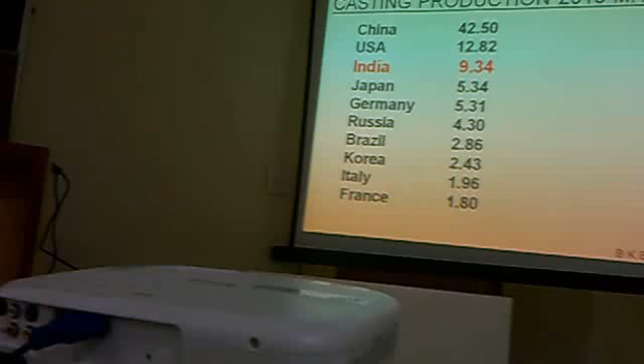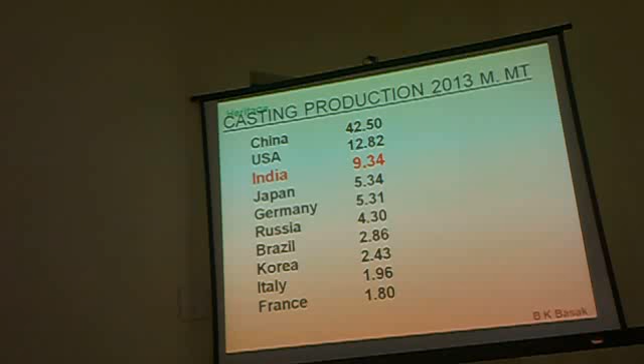Let's first go to the international scenario. I will be very brief. These are the 10 top casting producers in the world, and you can see India in the third position. First position China, next is USA. In fact, there have been quite a number of times when USA was in the third position and India in the second, and so on — it has been changing. Ultimately, do you think within the next 3-4 years India would permanently take the second position? To surpass China is next to impossible, because you can see the difference — volume of production is very, very wide and far ahead.

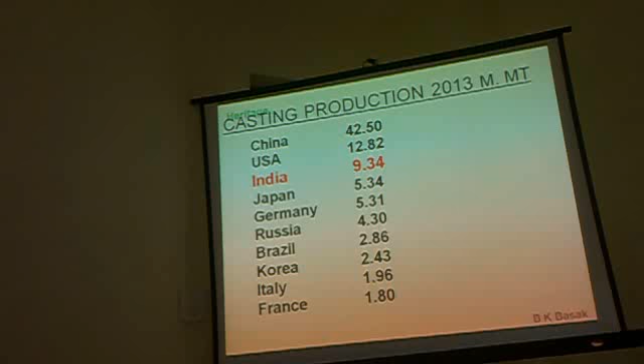Now let's come to the Indian scenario. We have about 4,500 to 5,000 foundries throughout the country. Out of these, about 80% are small, medium, and very small. Number of foundries with ISO 9000 is about 600, now it has gone to about 650. And number of very big foundries with world-class facility will be 10 to 12.

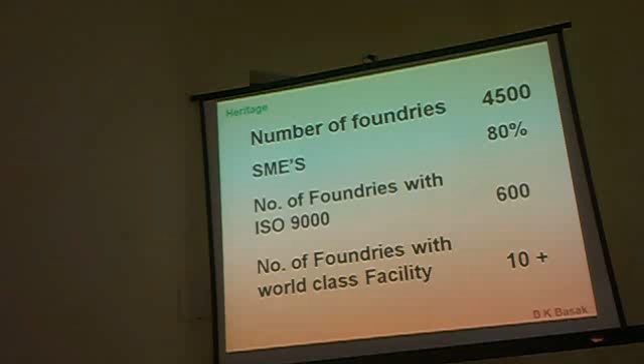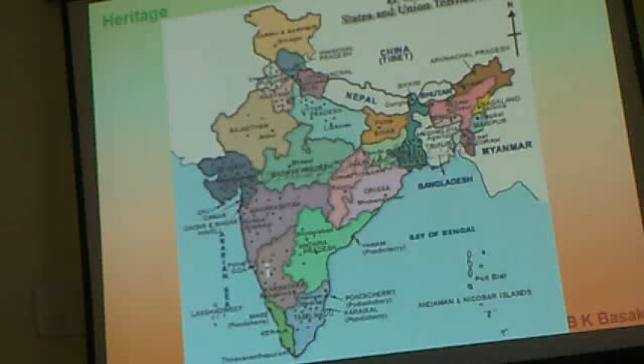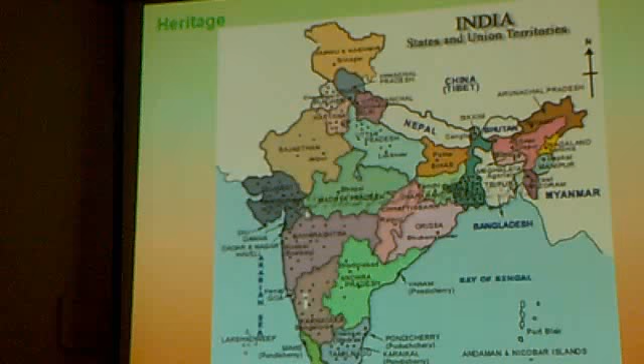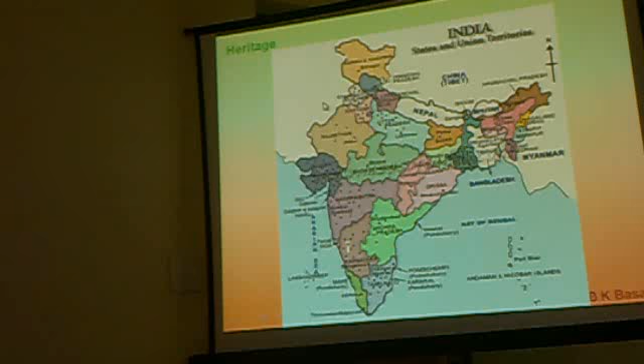You see the black dots — those are the foundry clusters. It's more or less distributed throughout the country, but there are distinctly few places where you can see concentration, like here in West Bengal, the Howrah belt. Then here in Gujarat, this is the Rajkot belt. Here is the Coimbatore belt, here Belgaum, and there are a few here — Kolhapur, Belgaum and Kolhapur together form a belt. And there is another cluster here. The rest of the places in the country might have one or two. Mostly these are the few places where the foundry industry is concentrated.

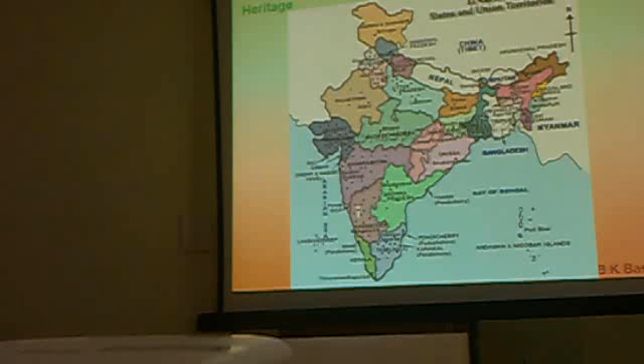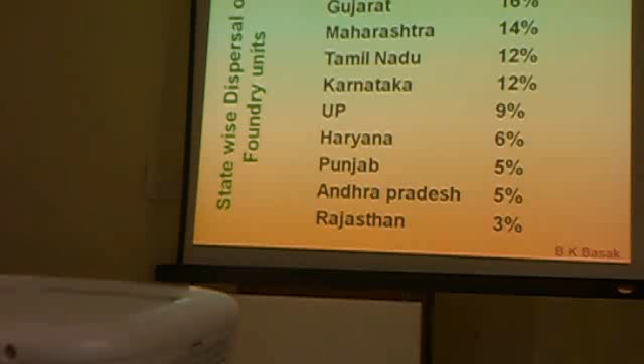You can see the figures — West Bengal is still at the top with 18%, Gujarat 16%, and so on. I shall show you the pie chart. This is the situation, the pictorial presentation of the foundry clusters throughout the country.

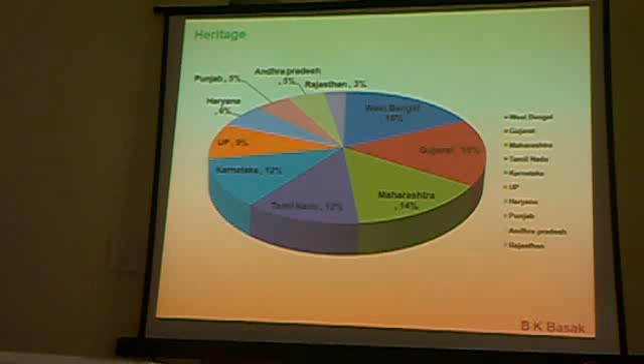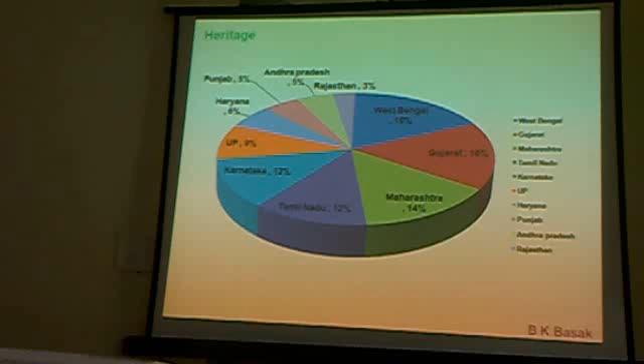This is of course outside your curriculum, this is for your general knowledge. You should know where India stands so far as casting production is concerned. It's not a joke — India is either in the second or third position.

Now, what is a foundry? You all know probably, you have been taught, I understand, so I am not going into it. I shall give you a pictorial where you can see there are 3 lines coming from the top. The right hand one is melting, showing a symbol of a cupola. The left hand one is the sand mixer, the Muller, and this is the core sand mixer.

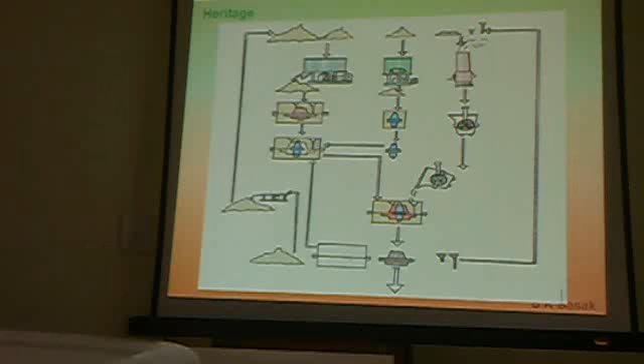Now what we need is a pattern, where there are 2 boxes, cope and drag, and we fill it up with molding sand. And if it is a hollow casting, we need a core. The core is prepared from core sand, and after the pattern is removed from the mold, this core is inserted here. So you have a cavity like this, and then you take the molten metal from the furnace with a ladle, pour it into the cavity, and you have a casting shown in red. Then when it solidifies, you get the mold and take the casting out. These are what we call runners and risers — it goes back into the furnace for melting. This box is recycled here, and the sand again is recycled. So it's a complete cycle.

Now you can see from here there are three major activities: melting, molding, and core making. These three processes are included in your curriculum, and I shall go by that. I shall first take up melting.

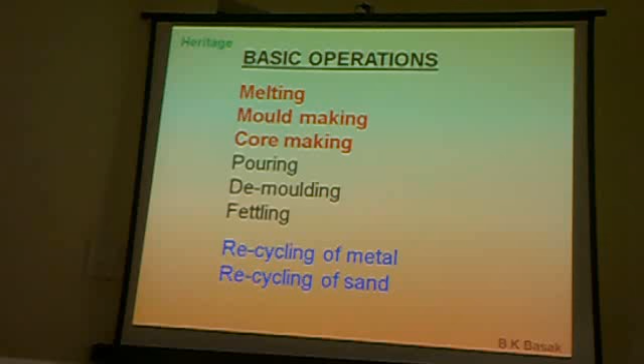Now, as you can see, this is summarizing the basic operations of a foundry: melting, molding, core making, pouring, demolding, fettling, then recycling of metal and recycling of sand. You can take it down.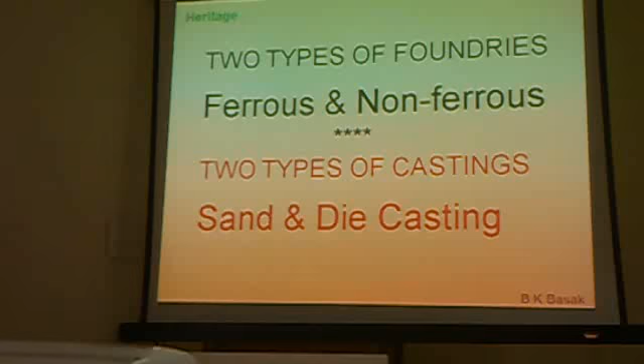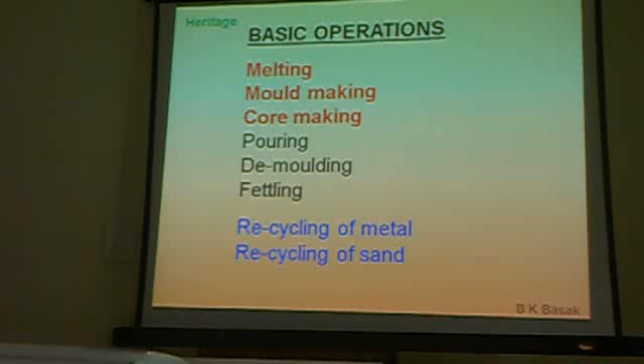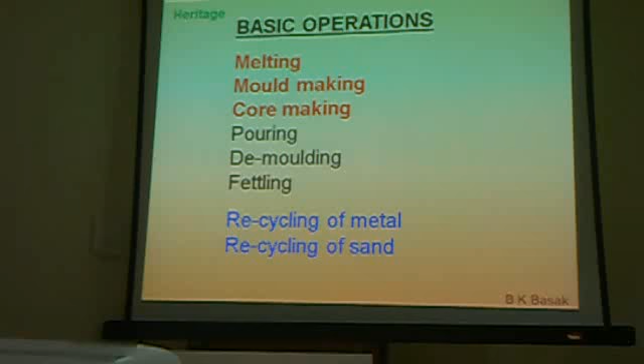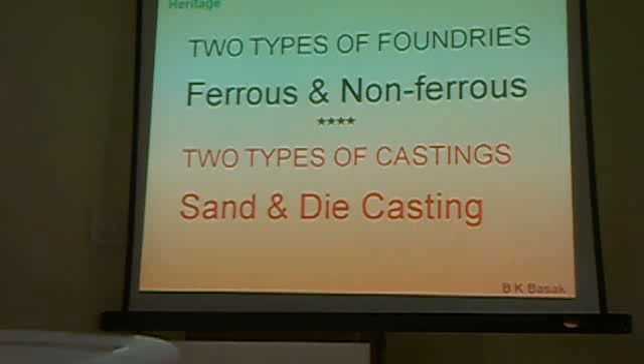Okay, then there are two types of forms — this one, this one. Now, there are distinctly two types of foundries: one is ferrous foundry, another is non-ferrous foundry. Non-ferrous means aluminium, copper, brass, bronze, and different alloys. And there are two types of castings — sand castings and die castings. Most aluminium casting these days is done in a die; die means a common mold made out of metal. But we shall concentrate on ferrous melting, ferrous foundry.

Now, these are the melting furnaces that are used in foundries. Have you seen a cupola, anybody? Yes sir. You have seen a rotary melting furnace? It's not in your curriculum, therefore I have not colored it. Electric arc furnace — you haven't seen, but you have seen an induction furnace.

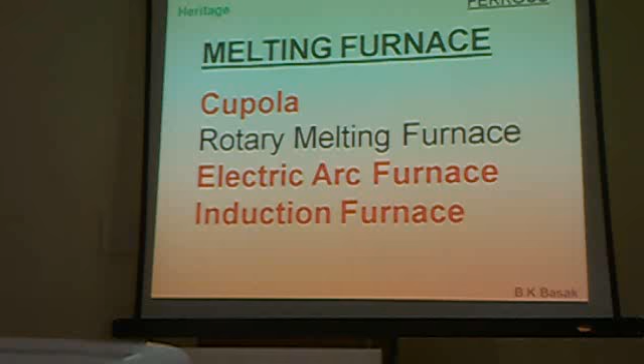So I shall go over to the first cupola.

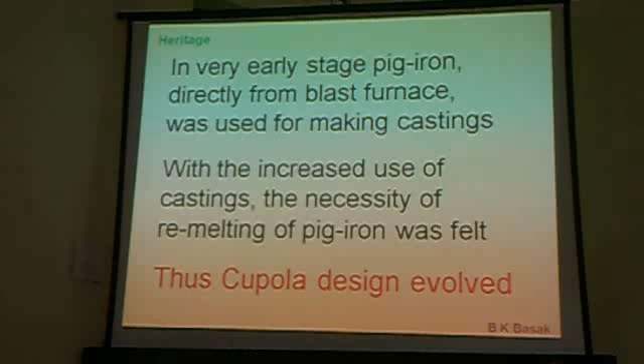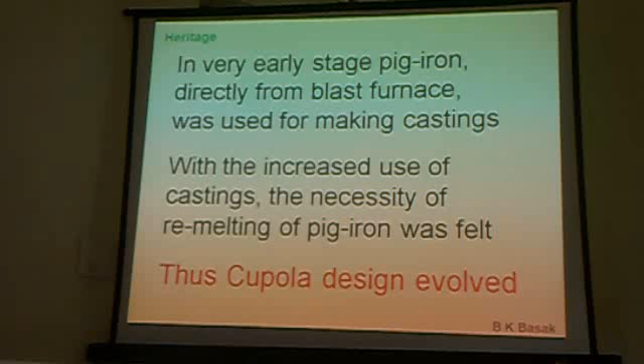When mankind learned to melt iron, they first learned to melt bronze, as it is called the Bronze Age. So bronze was the first metal people could melt and cast. Then that technology was adopted for melting cast iron, extracting it from iron ore to make castings. China was a pioneer, borrowing foundry technology from the Middle East and steppe area, and modifying it to make it suitable for melting cast iron.

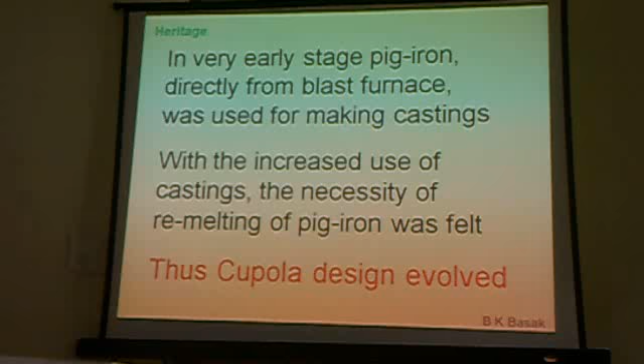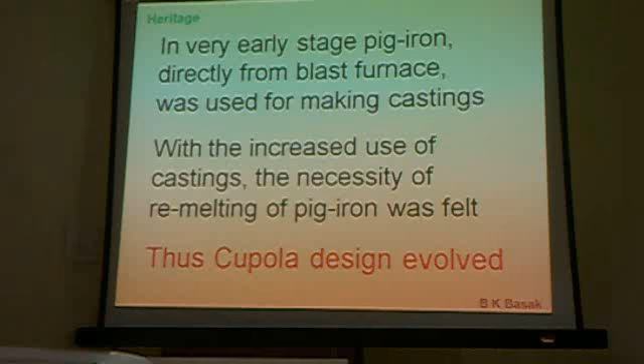In the beginning, there was no cupola. They extracted iron from iron ore in a furnace very similar to our blast furnace used these days, and castings were made directly from that. Whereas cupola is a furnace where you remelt the cast iron for doing the casting. Initially use was limited, but when cast iron use increased, we felt the necessity of remelting the iron obtained from the blast furnace. That's how cupola evolved. The first patent for cupola was granted to John Wilkinson of the UK in 1794.

You can take it down. In an interview, we may be asked this question.

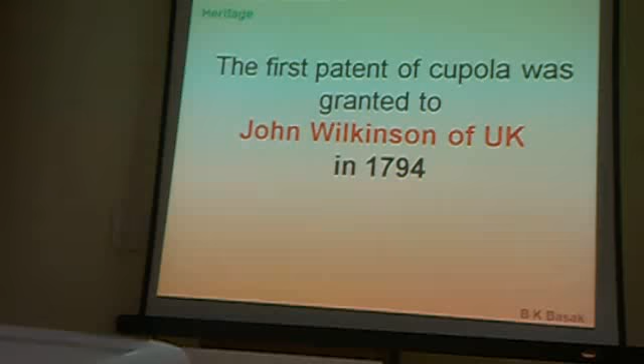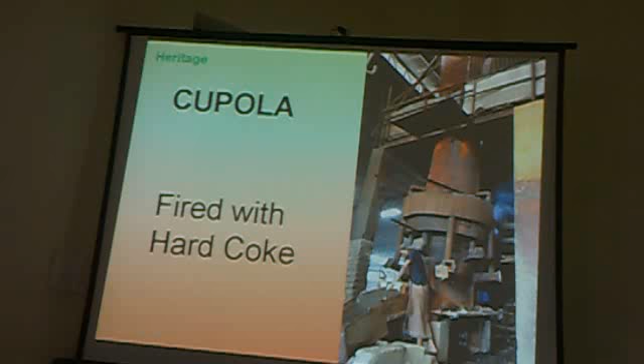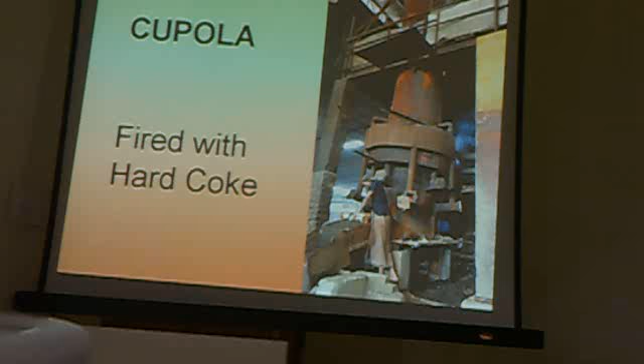Cupola is normally fired with coke. This is a picture of a small cupola. As you can see, a man is standing here, so you can have an idea of the scale, how big it is. That's how a cupola looks like. For those who haven't seen a cupola in real life, this gives some idea as to how it looks. This is a very small one; it can be much bigger in diameter and also in height.

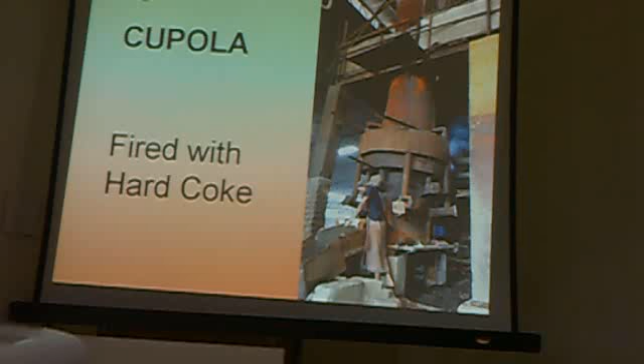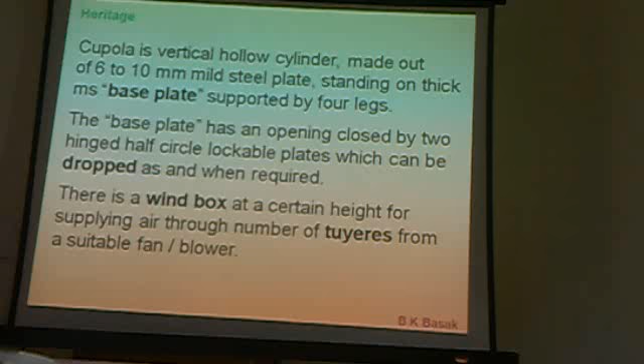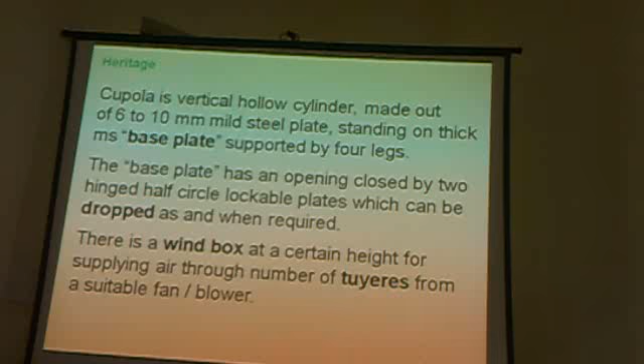I shall explain the parts of the cupola and their different operations and functions. Cupola is a hollow cylinder made of mild steel sheet, maybe 6 to 10 mm, depending on the size of the cupola, which stands on a thick steel or cast iron base plate. The base plate has an opening at the bottom, which can be closed with swing doors and can be dropped. There is a wind box -- this is the wind box and this is the base plate. Through the wind box we blow air; as you can see, these are the tuyeres. Through this we blow air into the furnace, where we need oxygen for combustion. This air is blown from a blower, or fan as we call it.

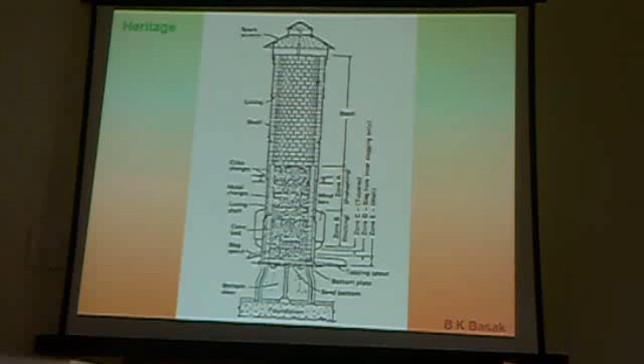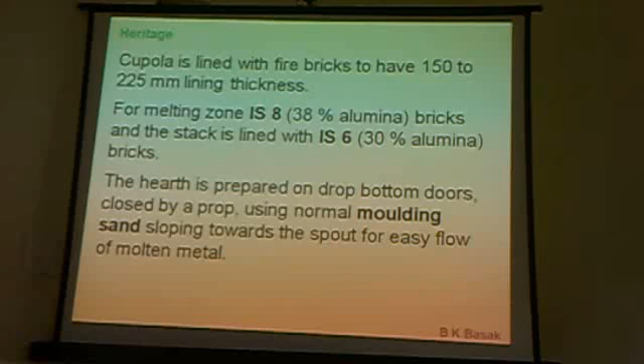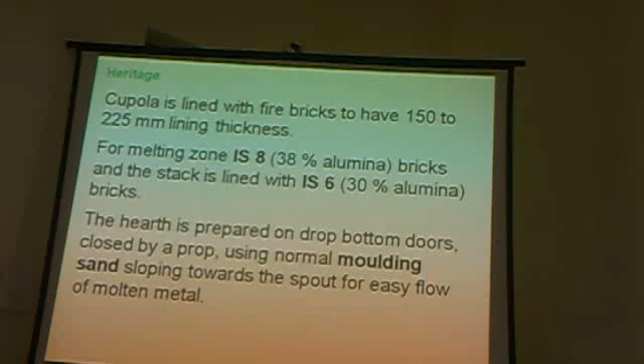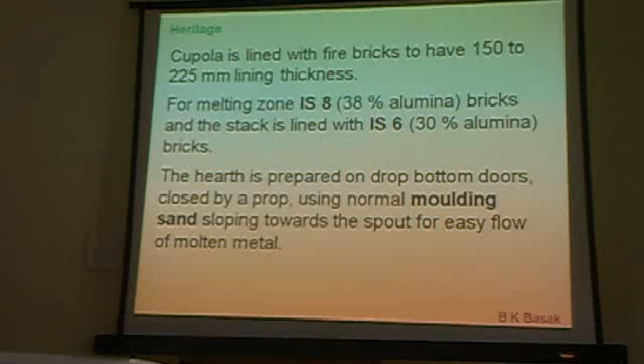This is the cross-sectional view of a cupola. I shall show you a better picture afterwards. Cupola is lined because there is hot metal inside, so you cannot use mild steel alone -- there has to be a refractory lining. The lining is 6 to 9 inches thick depending on the size. In the melting zone, it is lined with IS8 bricks, which contains about 38% alumina. The stack above the melting zone is lined with inferior quality refractory, maybe IS6.

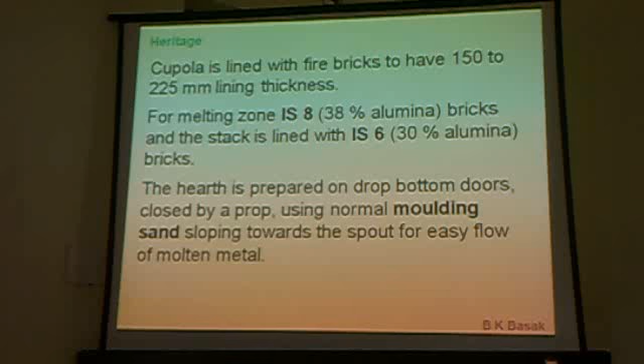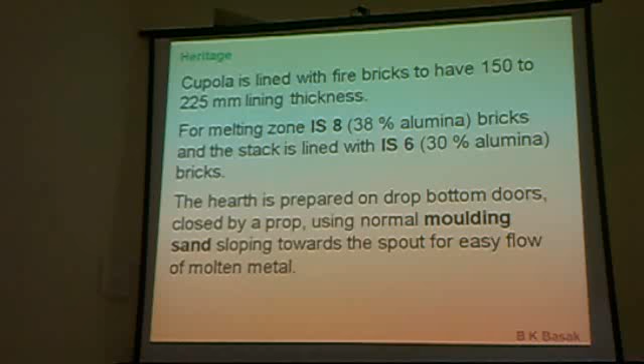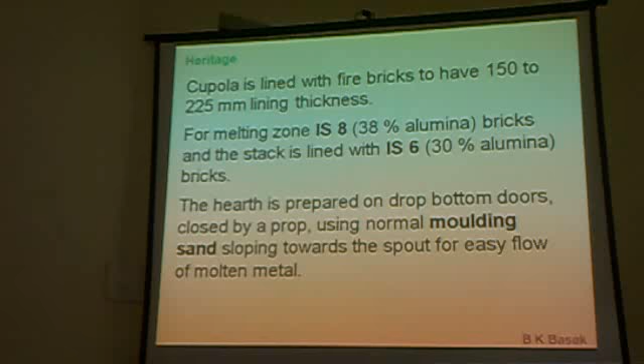The bottom is prepared on the base plate. We first close the door, put a prop, and then make the hearth with molding sand, making it slightly tapering or sloping towards the tapping spout, so that we can easily tap the molten metal which accumulates on the hearth. This is how a cupola looks like.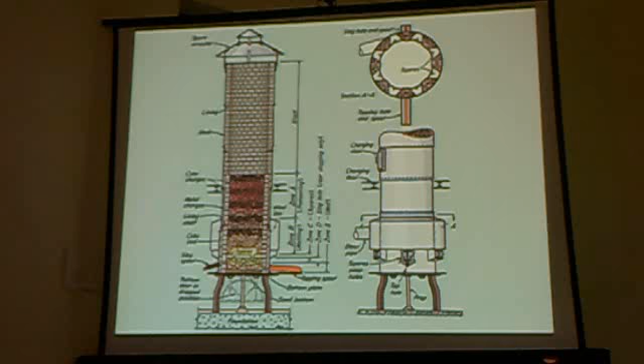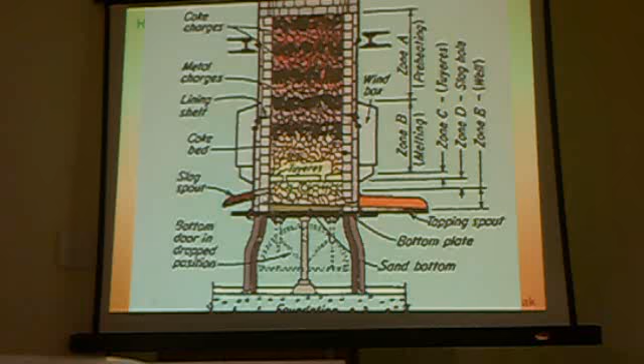As you can see, this is the swing door, half circle, which is closed and kept in place by a prop like this. This is the tapping spout -- the hearth is made of sand and sloping this side. This is the tapping spout and this is the slag spout, because slag will float on the molten metal, being lighter than it. So slag is removed from here and molten metal is taken from there. This is the wind box, these are the tuyeres, and these are the layers of coke, iron, coke, etc.

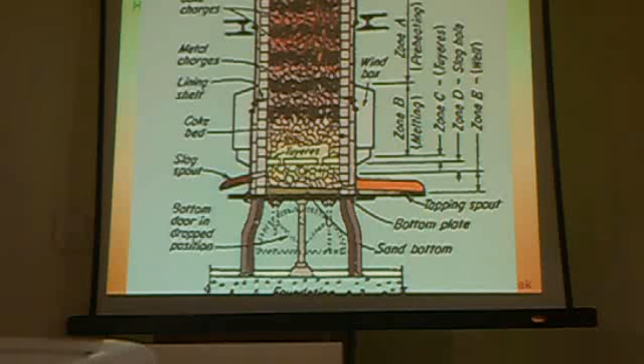Besides coke and iron, we need a fluxing element, normally limestone, or sometimes limestone mixed with dolostone, meaning dolomitic limestone. Dolomite is added with limestone to form a slag. If you want, you can make a simple sketch of it.

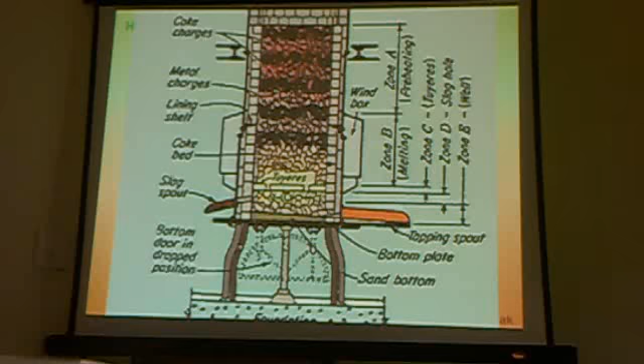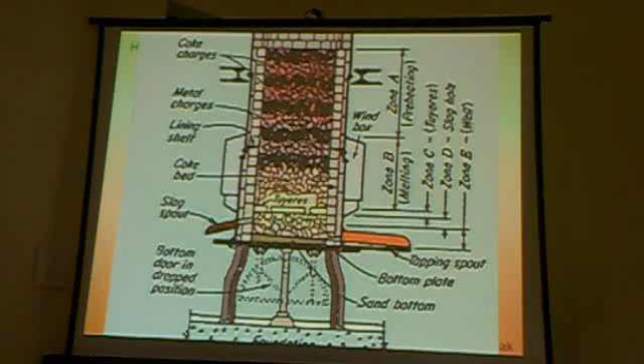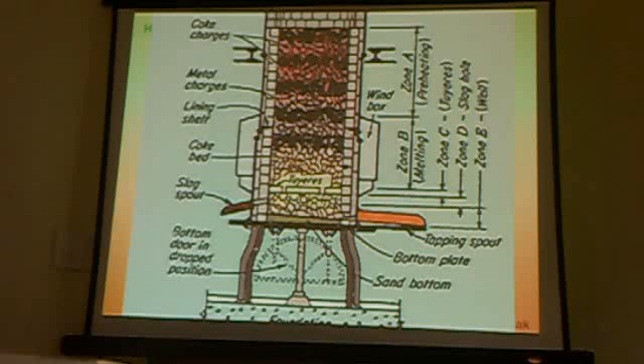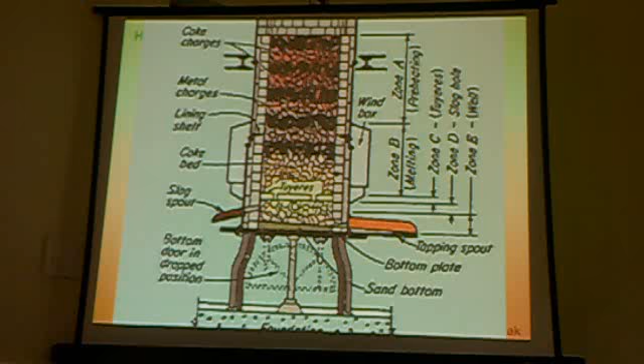What's the cause of mixing the limestone? Somebody asked -- what is the cause of mixing the limestone? Limestone is a fluxing agent which will make slag by absorbing unwanted material in the charge. It purifies the molten metal and forms a slag. It's a very normal thing in all metal melting -- while melting, a slag forms which contains either the oxide of the metal or some undesirable element, and that is to be removed from the system. Limestone is the main element used; sometimes dolomitic limestone is also added, but in very small quantity.

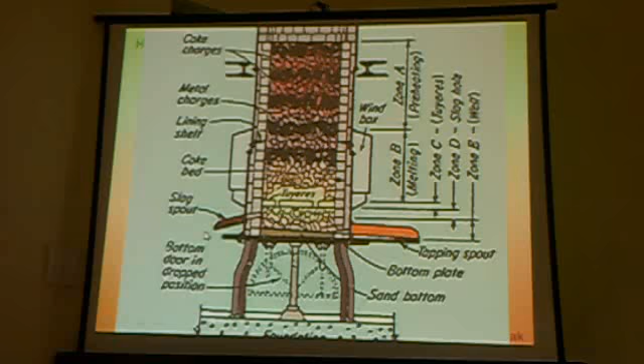Anybody making a sketch? Yes, sir. Shall I go over to the next slide? Yes, sir. Next slide.

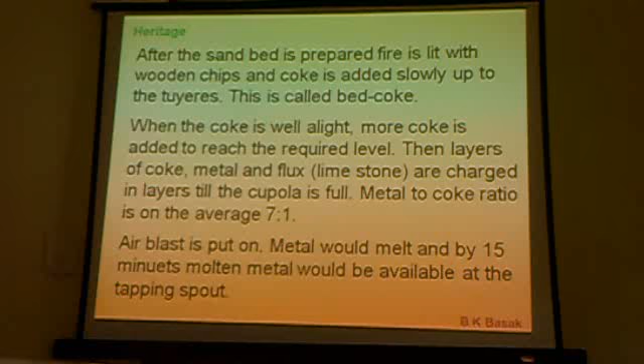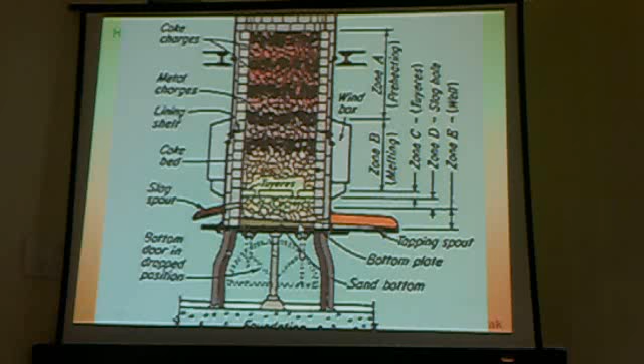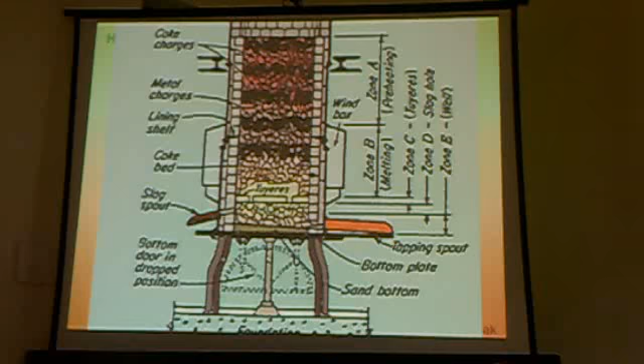After the sand bed is prepared, fire is lit with wooden chips and coke is added slowly up to the tuyeres. First, when the hearth is prepared, wooden chips are placed and lit up. When the fire is normal, you go on adding coke up to the tuyere level -- this portion is called bed coke. It generally doesn't react with anything and is recovered to some extent.

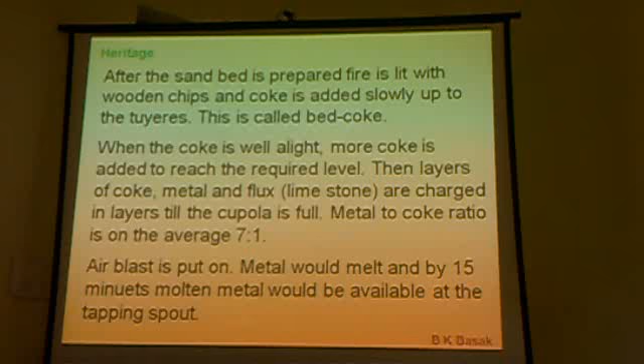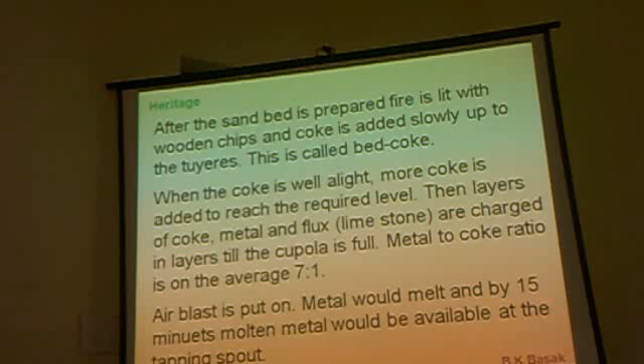When the coke is well alight, more coke is added to reach the required level. Then layers of coke, metal, and flux are charged in layers till the cupola is full. The metal-to-coke ratio is on average 7:1, meaning 7 kg of charge will require 1 kg of coke.